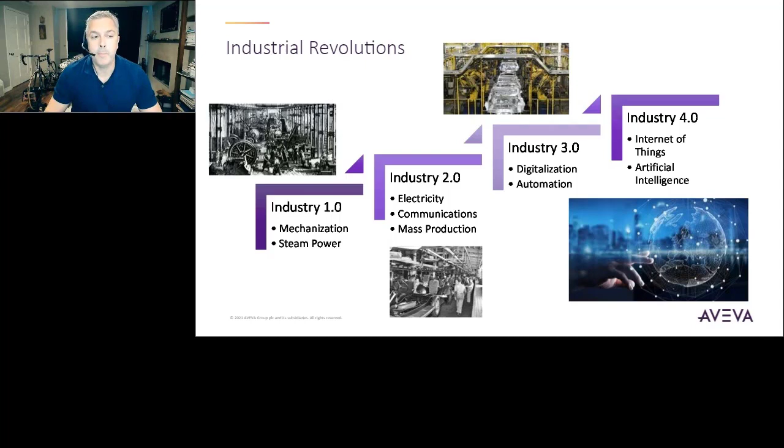If we look at the core tenets of Chemicals 4.0, it's really about the interconnectivity of data, the information transparency, not only to our process but within our organization, so that we have that real-time technical insight to drive decentralized and data-driven decision-making. So we want the people at the work front having the most information to make the best decisions possible.

And where are we at today? The chemicals industry worldwide represents about 7% of the gross domestic product. Tangentially, not only direct industry employment, but the supporting industries and services driven by chemicals, 120 million jobs worldwide. But in 2020, due to the COVID pandemic, we saw a 2.6% decline in overall output and production. We do expect to climb out of that here in 2021, but still problems abound.

Not only do we continue to have the disruption due to the pandemic, but we're seeing supply chain and other struggles as we come to grips in the global community. And that brings about three key themes. The industry today is looking to reinforce those gaps in supply chain. We want to be more nimble and more responsive to upset conditions. So look to our data community to begin sharing and applying that information across business boundaries.

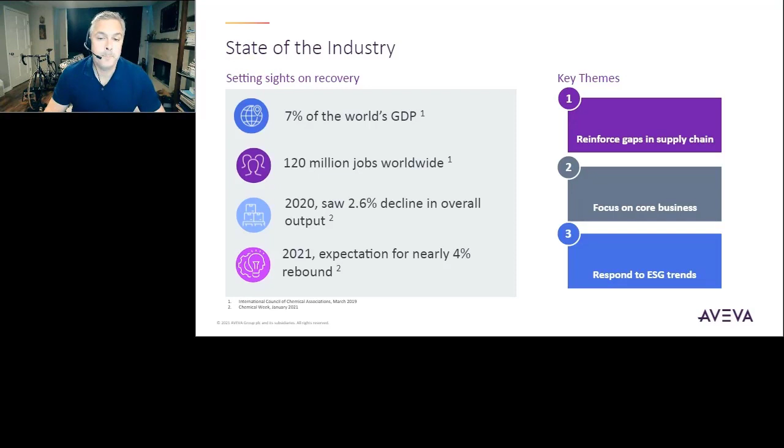You can see this from a variety of surveys that we have participated in. So industry and market pressures, 94% of our companies surveyed see supply chain disruptions. Over 50% of the CEOs look to sustainability as being a driving force in their preparations for the upcoming years. And many of us are seeing end-market shifts in demand. So as new products come on board, new materials, new processes, more sustainable processes are looking to be the demand going forward.

And finally, throughout the pandemic and a growing trend throughout our industry is the advent of remote operations. Not only because of the pandemic, as we see our supporting teams work remotely from the plants, from our offices, we need to get data to those people, but also the control room is no longer the foundation of our day-to-day activity within operations. Mobile devices have enabled our teams to be that true connected worker and have the information at their fingertips as they walk the plant and conduct their work throughout the day.

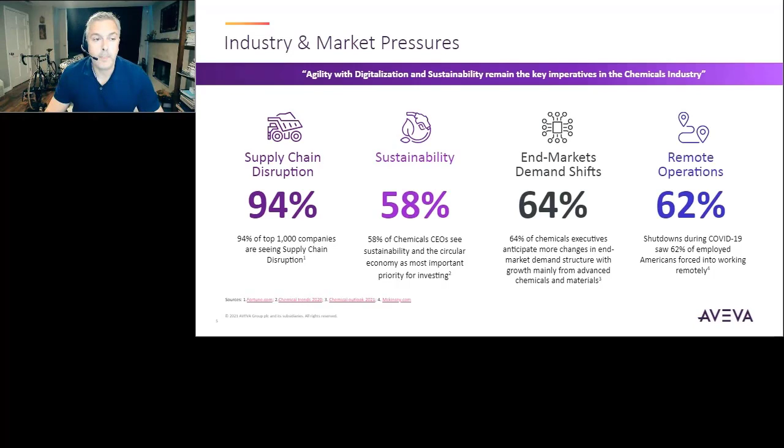So where do chemical companies find value? If you've talked to me before with the PI system, you know we have the same priorities that you do. Our health, safety, environment, operational control, asset health, building operational intelligence.

How do we do that? By improving your situational awareness, enabling hazard recognition, firming up your compliance tracking, becoming that system of record for your environmental and process data.

The PI system, our operational control, asset health, providing process awareness, condition monitoring for your equipment, being able to optimize our yields, our energies, being out ahead of event detection and being ahead of the problems so that we run more reliable and more profitable as we go.

And all we're building towards this operational intelligence. KPIs, building the dashboards so that we can manage by exception, integrate to higher analytics so that we can do more with the data that we have in real time, adding some self-service components so that people can get in and interact with the data, all the while driving that connected worker with mobile and remote access.

And finally, being able to retain that knowledge within the system itself rather than in our spreadsheets or on our local devices or in our brains as we move from place to place. We can retain that knowledge within the plants and companies that can benefit from it the most.

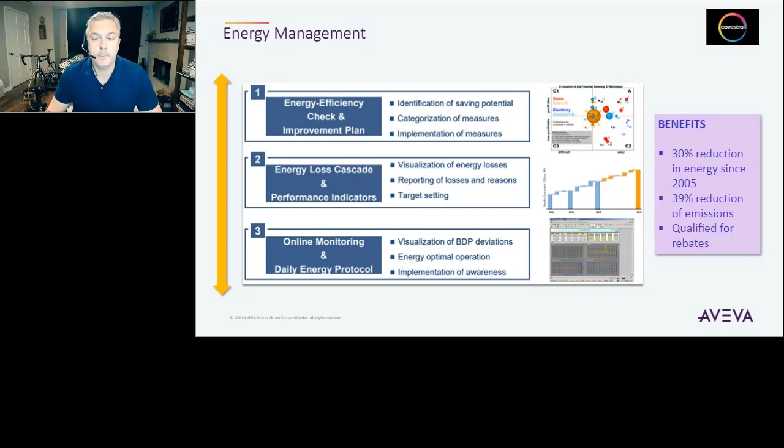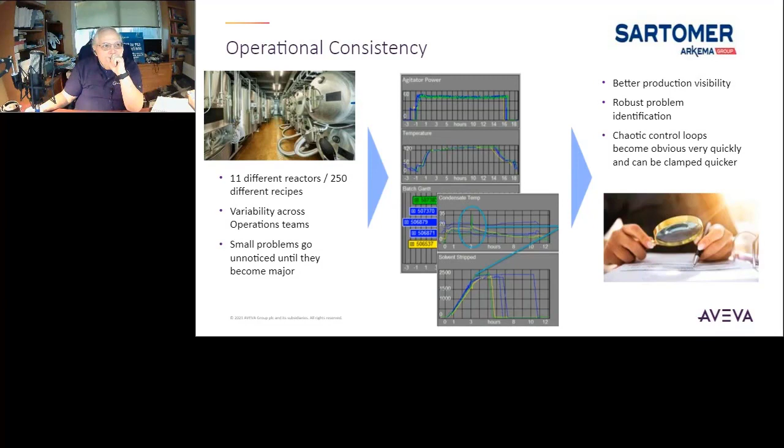An example from Arkema for operational consistency. They recognize with many different reactors, many different product recipes, and many different control operators, there's going to be variability in how we run those processes and how we deliver that product.

By using the PI system, we were able to monitor and assess against configured limits so that we know when we're getting off target, and we can look and coach those processes and those operations teams to get back on track and deliver better product with less variability in more efficient ways.

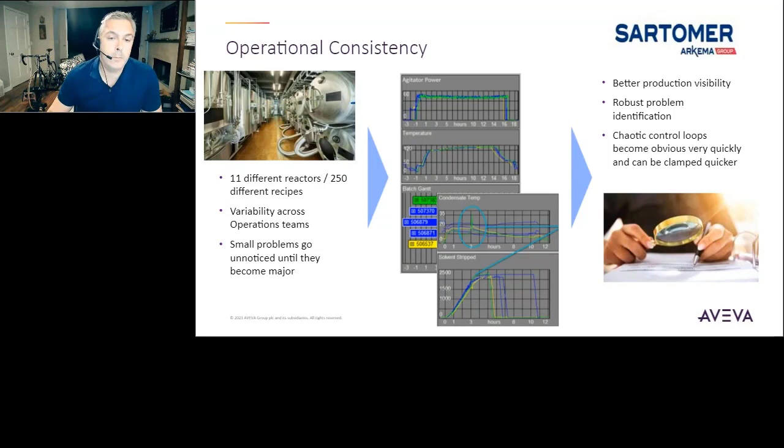Similarly, in maintenance, this example comes to us from Dr. Reddy's. This is one of my favorites because they start in the exact right place where I would start as an engineer. They looked at the critical equipment they have in their facility, conducted the FMEA, the failure mode and effects analysis for the fluid bed dryer, the coating machines, the compression machines, identified those critical conditions that indicated potential faults.

They configured the PI system to monitor for those faults and alert them visually and through notifications so that the right people knew instantly when work was going to be possible. And this enabled them to enhance their condition monitoring program and get ahead of any reliability events that might impact those assets.

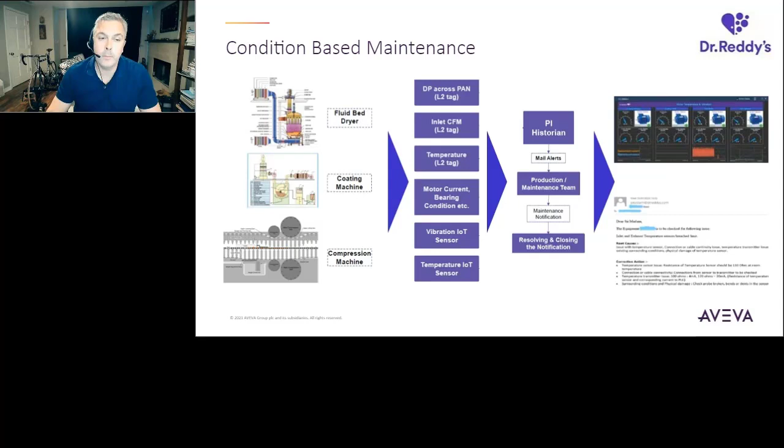You don't have to just be a singular plant or a complex like this. We have numerous examples from our customers looking globally or regionally to develop those remote operation centers, combining key elements of maintenance reliability, process optimization, energy optimization into a regional effort as well as a local effort.

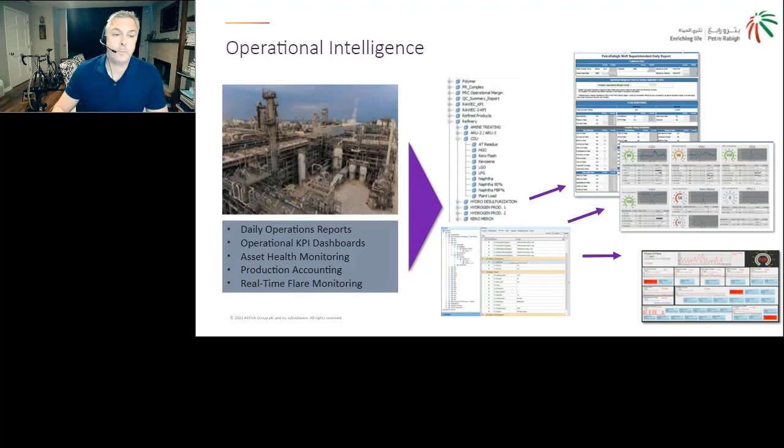So how do we do that? We talked at the front about what Chemicals 4.0 looks like, and we're really enabling that connected worker. And across our suite of technology, in addition to the PI system, AVEVA brings a portfolio of tools that really

enables that connected worker and helps our transformation into Industry 4.0. It centers around the digital twin. Within PI system, we'll talk about asset framework as our operational twin, and we'll begin adding the data we need to make more sense and add more value to that real-time data. The digital twin, at its essence, is just a digital representation of the data we need to run our business and our enterprise. It can come from a variety of sources, and it can be driven by the needs of the plant or by the needs of the enterprise. So from an operations, engineering, or asset information standpoint, finding the data necessary to make decisions at the best level possible.

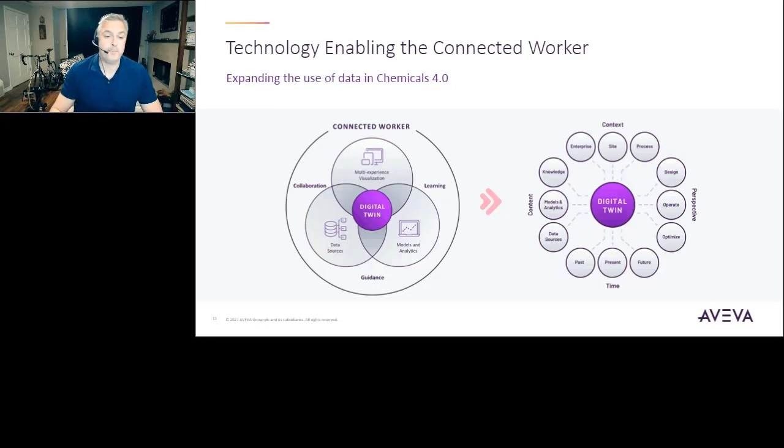Continuing to leverage the power of the PI system, we want to build those contextual elements. Every plant has a reactor, a pump, a heat exchanger, compressors, and other pieces of equipment and assets. How do we define those digitally? How do we organize it so that we can relate to the information, and the information can relate to itself in ways we haven't thought of before? We can add those KPIs, those analytics, to deliver situational awareness, not only at our unit and local levels, but across our enterprise as well.

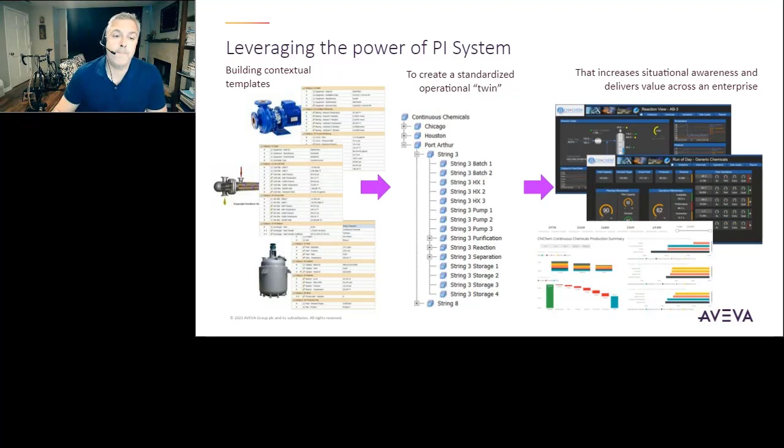Today, our sessions include Albemarle, Eastman, Air Liquide, and Covestro. I think they all hinge on great initiatives within the PI system and within our AVEVA suite of tools. Albemarle is going to talk about the use of PI event frames to drive their analytics package. It's a very innovative approach to combining batch data into a singular event frame and how they use that to drive analytics. Some of the visualizations are really key.

Eastman has really driven analytics and event frames towards operator alarm management, being able to alert operations teams to the right alarms at the right time, and how they track and visualize it are great examples in that presentation. Air Liquide continues on their journey and provides an update on remote operation centers and how they use that for energy and yield optimization. To round it out, Covestro is going to provide an update on their journey with process simulation and connecting that with real-time data. They've presented before on this opportunity, and they're going to elaborate on their use of AVEVA's process simulation and PI asset framework, and how they think those two will be working together in the future.

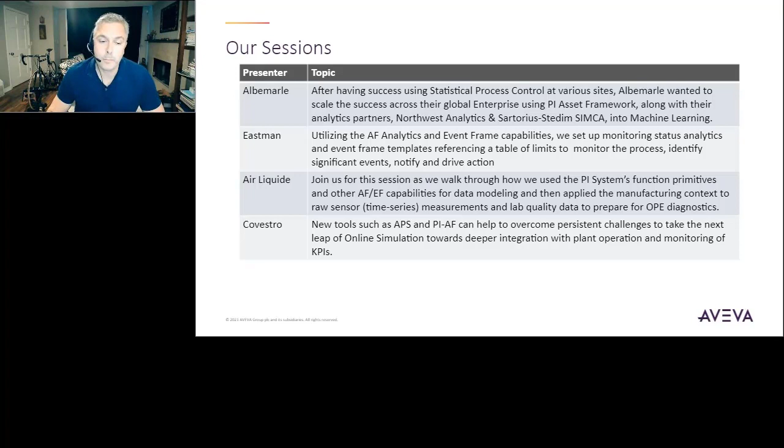If you haven't had a chance, please review AVEVA PI World 2021. In addition to these presentations and talks, we had a variety of other presenters: Albemarle, Eastman, LyondellBasell, Covestro, Ecolab, Bayer Crop Science, and Air Liquide, all offering up their opportunities to help you in your continuing endeavors.

In closing, I'll leave you with this: start simple, but simply start. The PI system, the AVEVA portfolio of tools, is incredibly comprehensive. You don't necessarily have to skip to the end. Understand your data, build that contextual awareness, identify the needs for how you define your digital twin, see how the data relates to each other. Begin by identifying those calculations necessary to do your business today. The anomaly detection, the event detection, how you define those, will really drive the analytics and the possibilities down the road as you grow in maturity with the technology.

And these will enable the artificial intelligence, the machine learning platforms, and all of this is digital, which enables the continuous improvement to evolve as you go and identify those key sources, so that you don't have to do the whole systems at once. You can identify those initiatives that mean the most to you and your facilities. With that, I thank you.